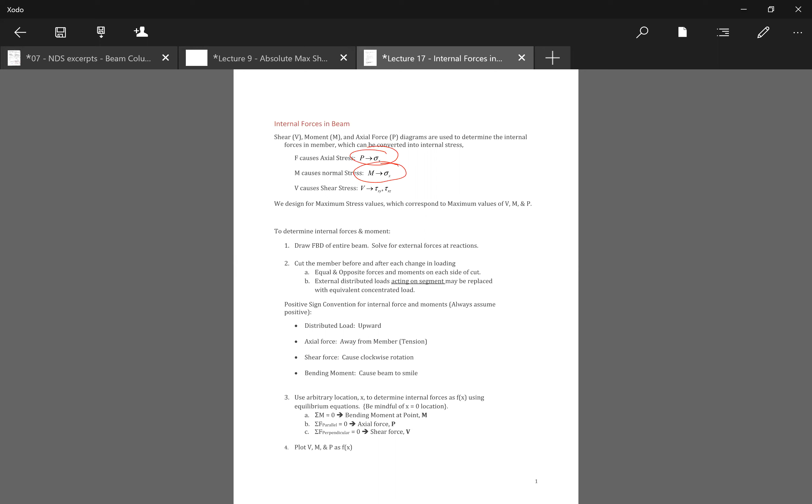Now that shear force will cause shear stress. I haven't shown you yet that relationship between the two, but after we get through moment, we'll go to shear in beams, and you'll see there's an equation that relates the shear force to the distribution of shear stress, in two directions, because anytime we have a shear stress component, say tau xy, we must also have a tau yx. Depending on how you load this beam, you could also have an xz, so we could have our xy or xz depending on the direction of the forces being applied.

So we're designing our beams for these maximum values of V, M, and P, where P is the axial force. In order to determine them, you draw a free body diagram. You have your beam, you take a section cut, and then you draw the free body diagram for that section cut. The whole beam together helps you get your reactions if it's determinate, but then once you have your reactions, you can take a section cut.

So you have, say, your beam with some loading, and you can get these reactions. Once you have those, you can take a section cut. You have this loading, and now you know there's got to be some other kind of internal force—that would be your shear force. And conceivably, you could have a P or an M, depending on how this is loaded.

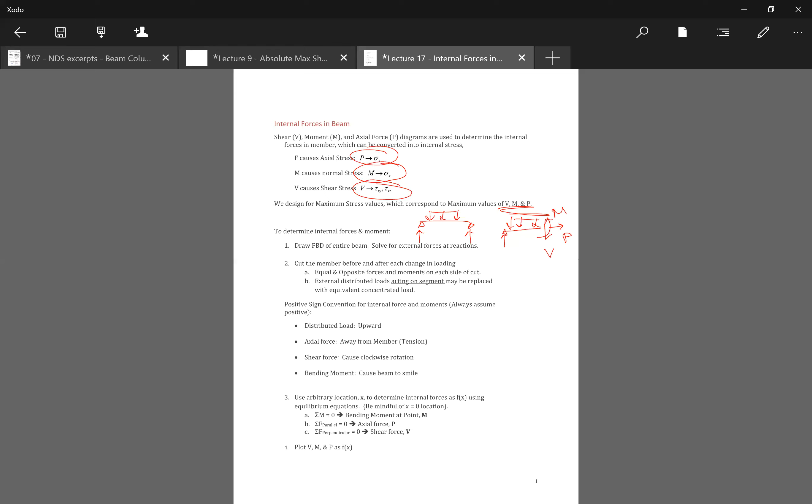When you take a section cut, for example, if you cut it apart like so, you're always going to have equal and opposite—I should draw those the other way—equal and opposite stresses, or forces, on each side. So if you have shear going in one direction on the left side of the cut, it's going to be going in the other direction on the right side. Same thing with moments and axial loads.

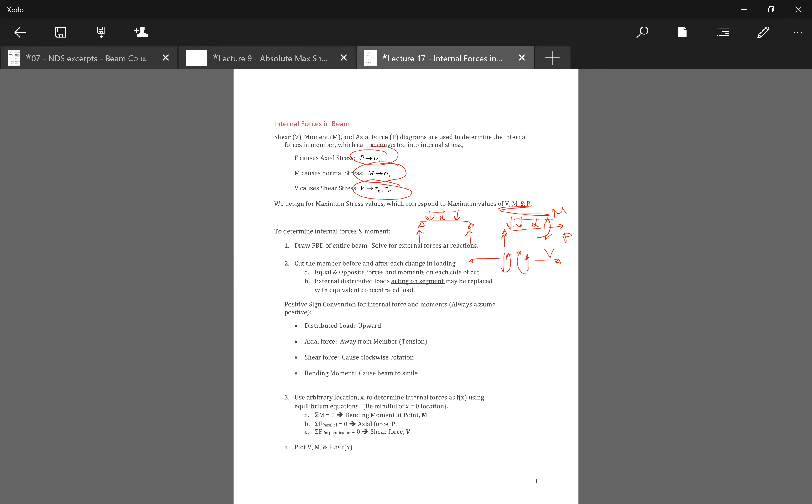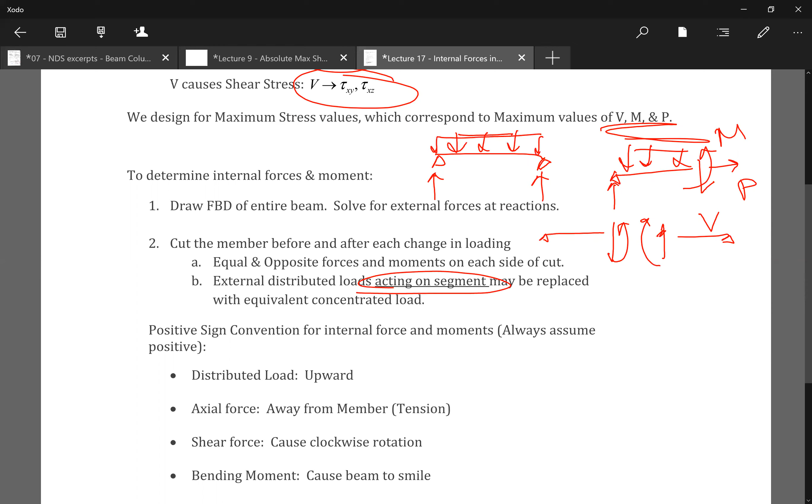This next point is extremely important. It may seem obvious, but it's a very common mistake: if you have distributed loads, you can replace them with a concentrated load, but only the amount of that load that's acting on the segment that you've cut. For example, if we have this distributed load all the way across the beam, that can be replaced.

That can be replaced with a resultant like this if you're doing equilibrium of the whole thing. But if you are doing equilibrium of, say, half of that member, you have your distributed load.

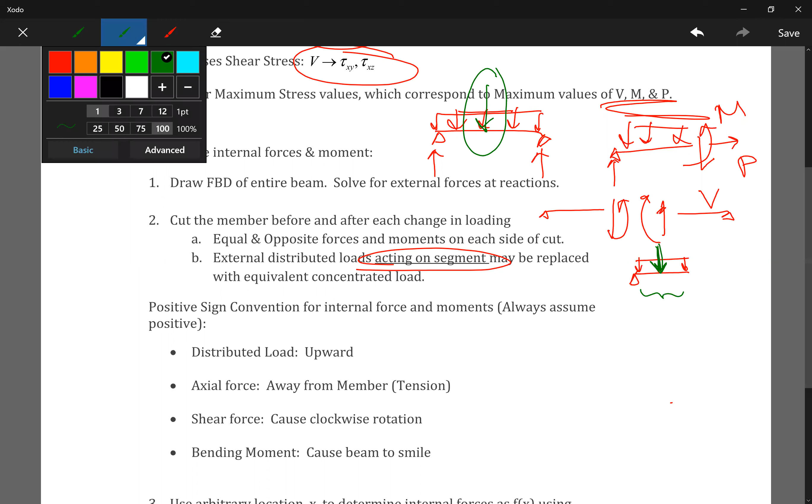Now when you replace that with an equivalent force, it has to only be the force that's equivalent to the load on this segment, and you place it at the centroid of that load. If you were to take this load here, let's make that a different color. If we were to take the whole load and turn it into a resultant at the center, and say this cut is at the center, you would have it placed there. As you can see, that green and that blue arrow are going to give you two different answers, especially in terms of your moment.

So it's extremely important that you only replace the portion that represents the segment that still exists after you draw the cut. Because even the worst case would be if you took this cut slightly to the left of that middle, you wouldn't have a force acting on it at all if you had done it improperly and represented it as the resultant of the whole force.

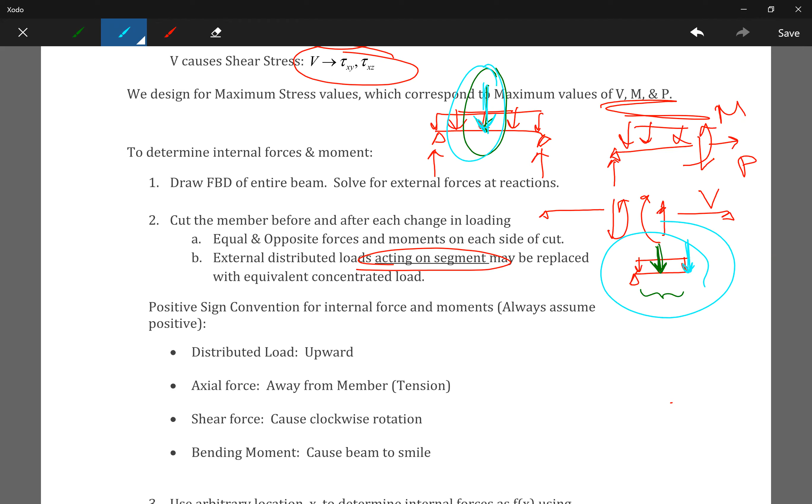Sign convention is really important. If you have a sign convention that differs from what I'm about to show you and it works for you, that's fine. But this is what this textbook uses, and so that's what I'm going to use.

So for our distributed loads, if this is our beam, positive distributed load is upward. And for tension, this one I don't think I've ever seen different—it's always outward. The distributed load I've seen done the other way. In fact, I like to do it the other way, but this is the way the textbook does it: up, tension is out.

Shear force is clockwise rotation. So if you have a cut and you're looking at the right-hand side of a cut, if your arrow is to the right of the member, it should be pointed downward. If it's to the left of the member, it should be pointed upward. That would give you clockwise rotation.

And my favorite: positive bending moment always makes the beam smile.

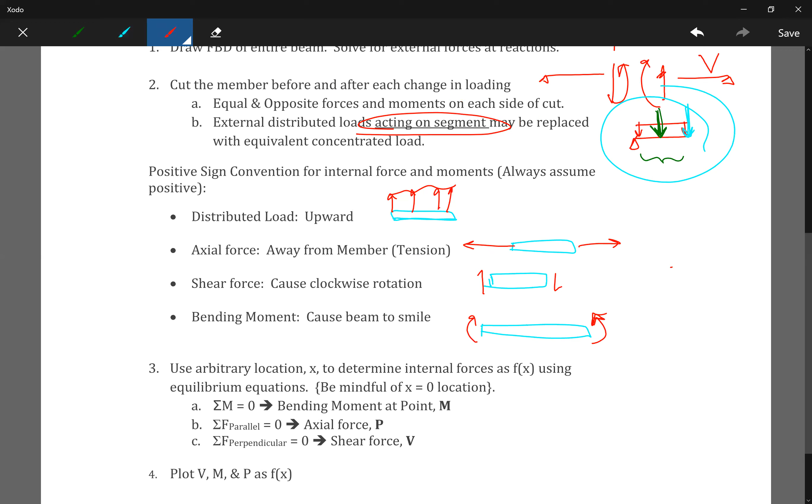So one way to get the values we're interested in is to use an arbitrary x location to determine our internal force. What I mean is, if I have a beam that looks like this, I would break this up into two regions: the first region and then the second region. Starting here, I would have x going from 0 to whatever this L1 is.

And then it's your choice. You can either have x go all the way to the end, or you could restart x again here and get your equations accordingly. You just have to be careful, because when you're getting equations for shear and for moment, how you define x will change your equations. The end result is going to be the same, but...

For whatever reason, let's say our shear diagram was going to look like this. If you define x as starting at that point, this is going to be a linear equation of the form mx—you have a slope and then an x value. Whereas if you were defining x as being continuous from the left-hand support all the way across, now you need to track that all the way back to where it would intersect x equals 0. So now this equation is going to be mx plus b, and you need to figure out what that b would be at this initial x equals 0 location.

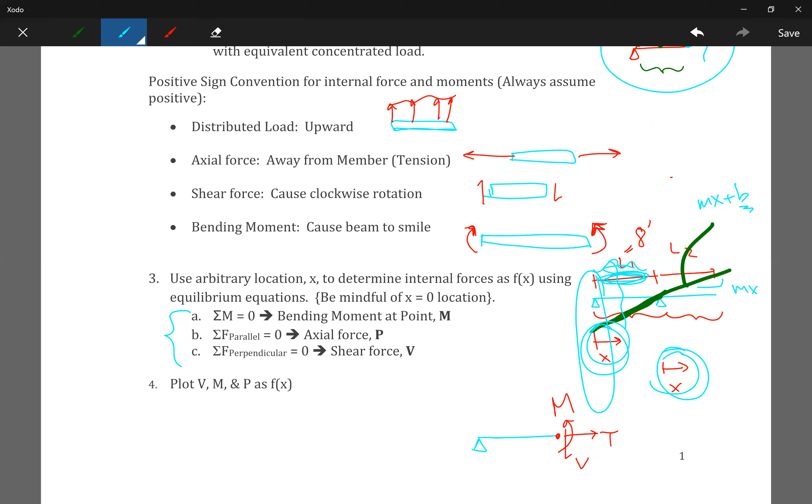Okay. So that's one way to solve for your internal forces. That's kind of a formulaic method that doesn't require a lot of intuition, but has defined mathematical procedures.

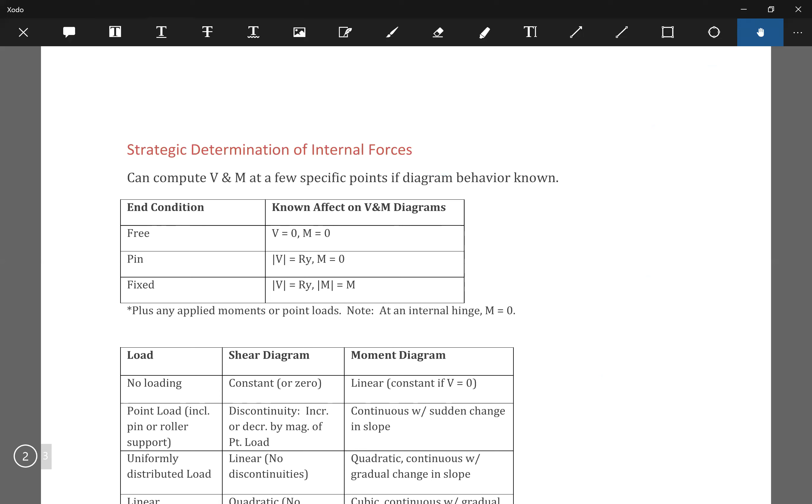My preferred method, because it's faster, is more of an intuitive method, where you strategically determine certain values at certain locations, things you know to be true. For example, certain supports have zero moment or have a known value of shear. So I like to identify those points and then use what I know about the relationship between my load and my shear and moment to visually draw what it would look like, and then I can calculate the numbers using some basic geometry, basically. Cool. So the things that I know.

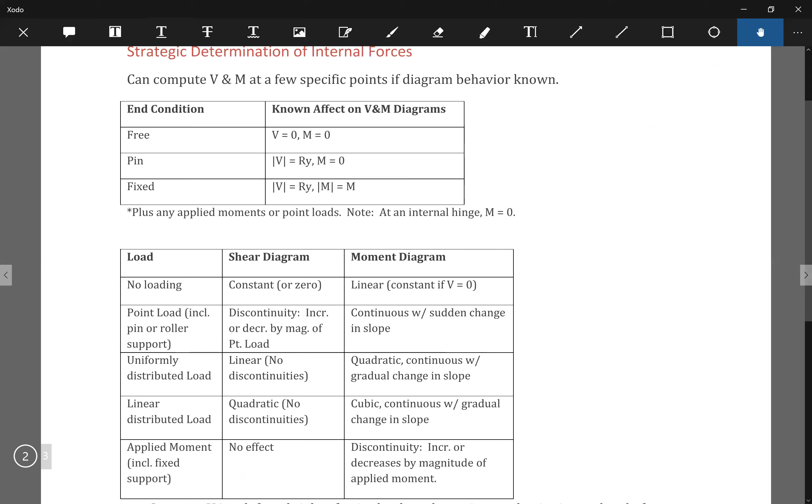When I have a free support, so say I have a cantilever out here on this end, I have zero shear and I have zero moment. So whatever my diagram looks like, I know it has to end at zero for both shear and moment.

When I have a pin, let's say I have something like this, and when I say pin, that includes rollers as well. So when I have a pin or a roller, I know that the shear, you have to be careful with how I say this. On the left-hand side of the diagram, the shear is equal to the reaction. And at any other point, I know that there's a change in the shear that's equal to my reaction. And I know that the moment is zero at that point. So whatever this reaction is here on the left-hand side, I know my shear diagram will start at that value, and then I know it's going to end back at zero. It always ends at zero, unless there's some shear moment at that point. But it always closes.

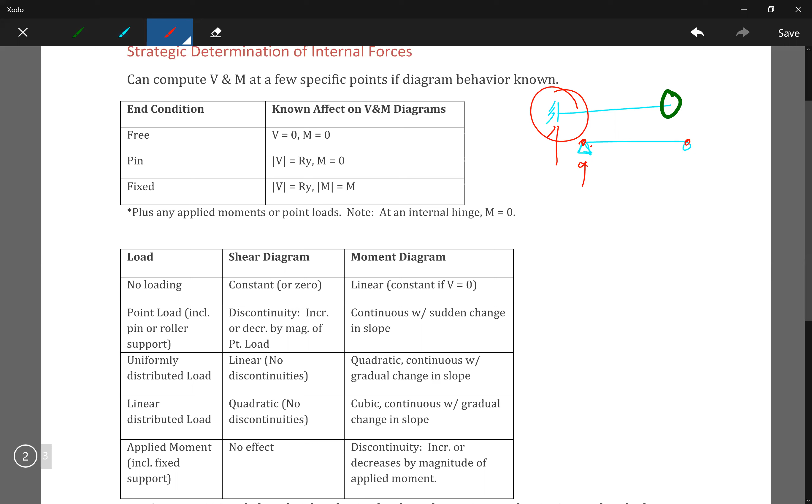And I know that the moment at these two points will also be zero. The reason that you get moment is because you have resistance to bending at that point. But if you're connected to a hinge that can rotate freely, there is no resistance to moment. Therefore, you can't develop moment. If you fix it and you don't let it rotate, now you have a moment present. So at a fixed end, what I know to be true is that if I have some reaction here, assuming it's on the left-hand side, that will be the value of my shear, and that will be the value of my moment, whatever that reaction is. You do have to be a little bit careful with the sign. Sometimes you can get turned around with the sign, but there are tricks for that as well.

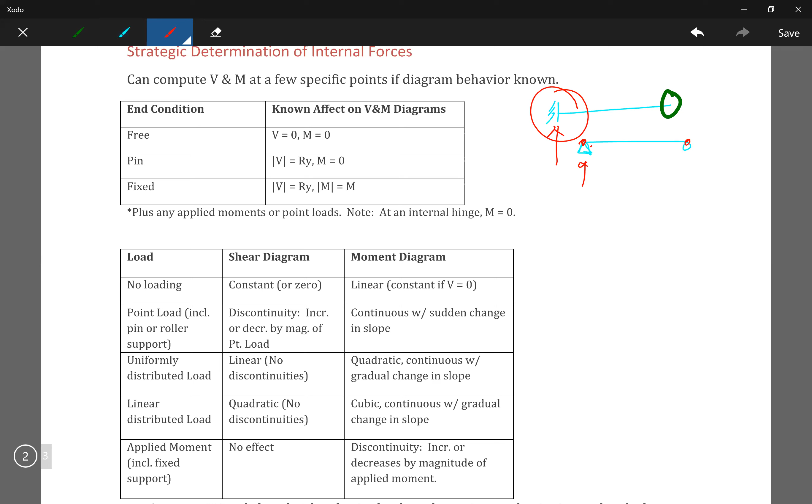All right, so then we look at our loading. If I have a region of no loading, I know that my shear diagram is constant. So if I have, say, just a point load here in the middle, to the left and to the right of that point load is what I call no loading. So the shear diagram for that should be constant. What do you know about the shear at this left-hand support? It's equal to the reaction, which happens to be half of that load. Then I move to the right and I say, okay, now I have no loading. That means there's no change. I have a constant value of shear.

So that's step number one. Step number two is point loads. Anytime I have a point load, my shear moves in the direction of that point load. So this point load is pointed down, my shear goes down by that same magnitude. And then what happens when I continue to the right? Continues constant. And then at the end, I have a reaction going up and it closes my diagram. Always has to close. So I can just look at this and I intuitively know what shape it has to take. I didn't have to do any algebraic formulas. And then if I want to know this magnitude here, I need to solve for the reaction. And there we go.

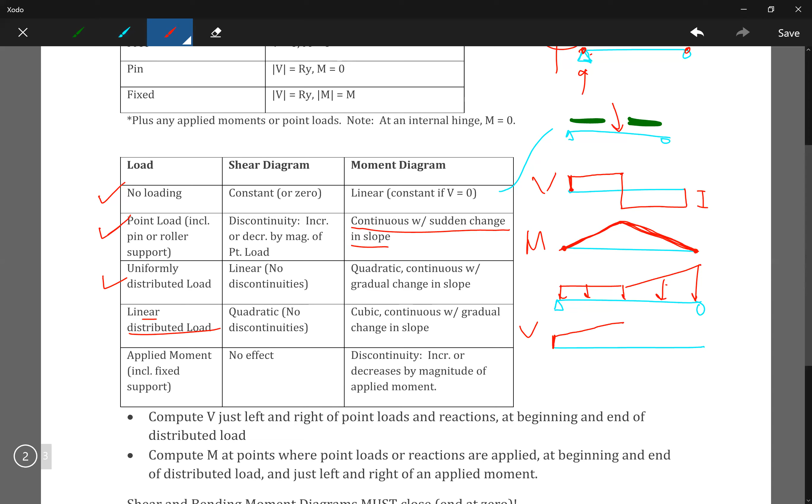We know we're going to start with some reaction for our shear. And then we're going to have, if we have a uniform distributed load, you will always have a linear shear diagram. So this is going to go up. And if you have a linear distributed load, which is this right here, so it's increasing magnitude, it is going to be quadratic. So the scale that I've chosen is going to make that intersect with the other diagram, but let's see if we can.

So it's going to go like that. Oh, I don't know what I'm doing. Don't do that. That was linear. Quadratic. No, I'm going the wrong direction. Should be going down.

Right, they need to go the same direction as the loading. So if I have distributed loading going downward, this linear slope needs to be going downward. Then this continues downward. That's better. And now my reaction on the other side, which will be larger because more of the load is over on that side, is going to come back up to close it. So I don't have any numbers, but I know the general shape.

So when I have that uniform loading, it's linear with no discontinuities. And when I have the linearly increasing or decreasing distributed load, it's quadratic, but once again with no discontinuities. So at this point right here, it should be continuous. There should be no discontinuities. And in fact, it shouldn't have like a sudden kink in it because these two have the same magnitude at this point. It should just be gradually changing from there.

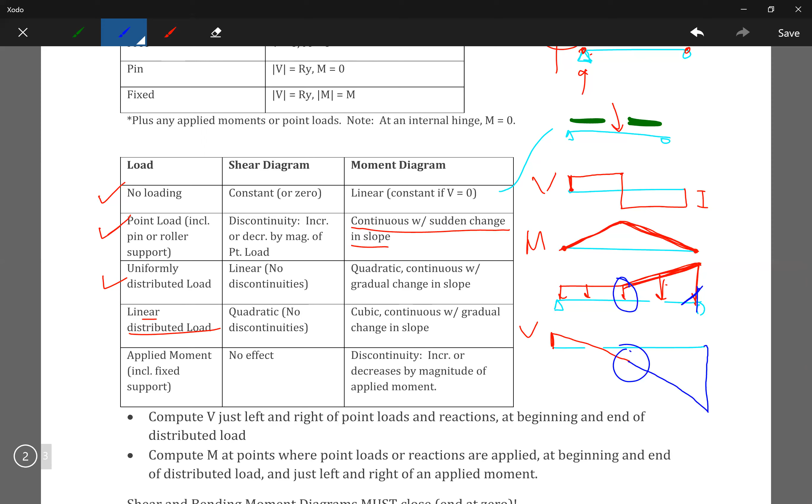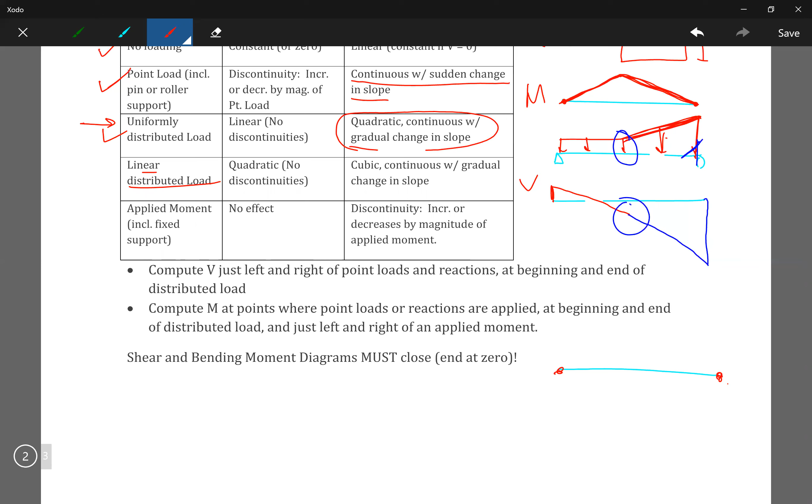Okay, so then for the moment, let's see, moment. Come down here. We know we start and we end at 0. For the uniform distributed load, it's going to be quadratic and continuous with a gradual change in slope. So let's see, we're going to be quadratic. So to answer your question about how to know which direction it goes, let's see, do I have it written here somewhere? I don't guess I wrote it. Okay.

What we're going to talk about in just a second is that the slope of the shear diagram is equal to the distributed load. So this slope here is equal to that magnitude. So if this has a positive magnitude, this should have a positive slope, and vice versa. So similarly, your quadratic equation, if we're integrating this linear portion, your moment's slope should be equal to your shear. So where we have this intersection here, we should have 0 slope. And where we have this positive value of shear, we should have a positive slope.

But the problem is that could go like this, or it could go like that. So the other thing to keep in mind is what I just said, the slope of this diagram is the magnitude of the shear. So yes, we've agreed that it's positive this whole length, but it starts from a relatively big positive number and goes to a relatively small positive number. So that means that your slope should be starting with a relatively big positive number and then approaching 0.

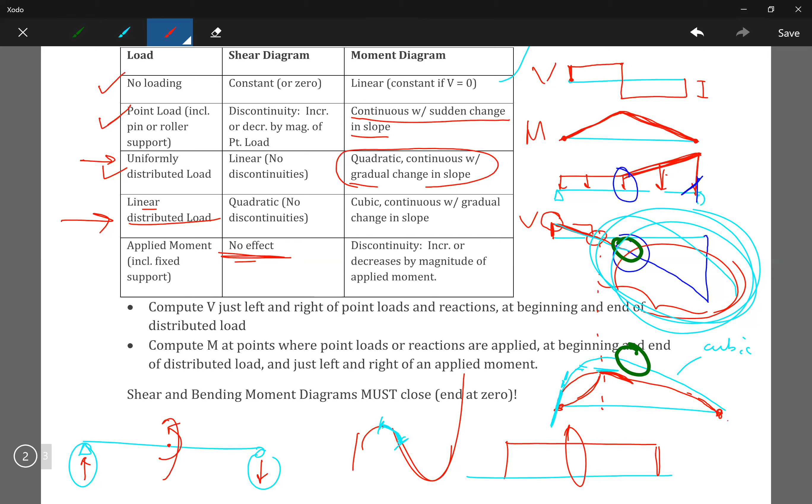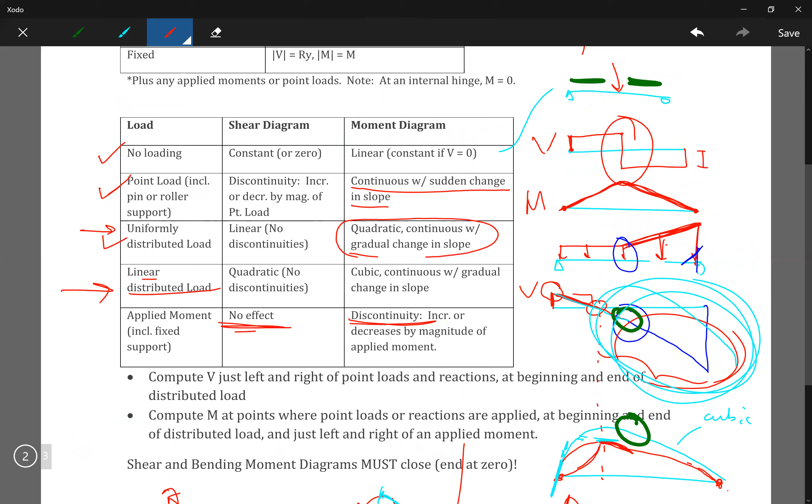But this applied moment in the middle has no effect on that shear diagram - you don't have any change in slope or magnitude at all. Then it does create a discontinuity in your moment diagram. Just like a point load causes a sudden jump in the magnitude of your shear, this causes a sudden jump in the magnitude of your moment. So if you have your diagram like this and you start at 0, you're going to be going up, then you have this sudden jump, and then you're going to go up again. You might ask yourself how do I know whether this is jumping up or jumping down? Well, there are 2 ways. One is when you're integrating the shear, it's positive - this whole thing is positive, so these lines always have to be positive slope. You know you start at 0 and end at 0, so you know those 2 lines have to look like that, and therefore you have to have this go down in order to make it continuous. You always start with the things you know with certainty, and then you fill the rest in.

But there's another way to figure it out. I always think about what that moment would be doing to the portion of the beam that is to the right of the moment. Because here's the problem - if you look at the left-hand side, you might think this looks like a happy beam, right? This looks like a positive moment. But don't be deceived - you always look to the right of what the moment is doing. So you keep this moment rotating another 180 degrees, right? The same moment is actually making the right-hand side very sad. So as you're moving from the left to the right, it's making the beam sad. Therefore, it's going down. That's what happens in my head when I do moment diagrams.

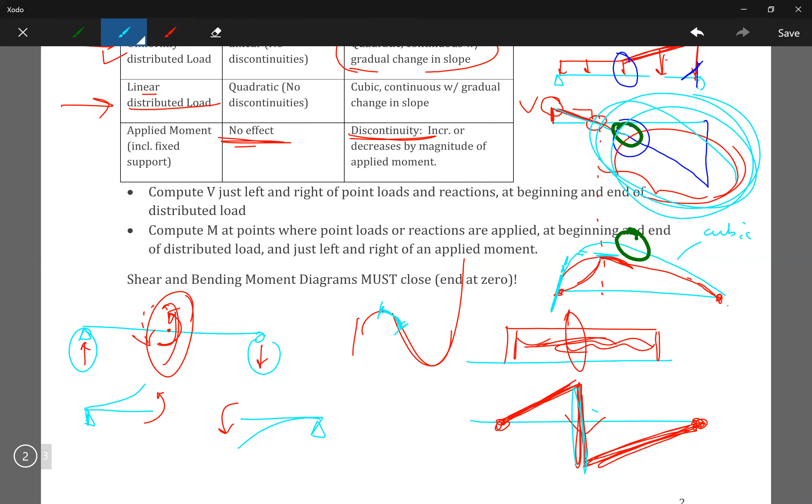Compute shear just to the left or right - so anytime you have a point load, a reaction, or a concentrated moment, you can compute the values just to the left or right of that to get the value of these diagrams. You can probably get the shape in a minute, then spend the rest of your time taking those little cuts to figure out the corresponding important values. So just to the left and right of point loads or reactions, or at the beginning and end of a distributed load, compute the moment at points where point loads or reactions are applied. It must always close - it must always end back at 0, start at 0, end at 0.

Okay, one last page. So we have these relationships between the distributed load, and we've already kind of alluded to them in order to finish talking about that table. But it's the idea that if we have a small segment of a beam and it's being acted on by some positive distributed load, W, acting over delta X.

Let's draw our shear as being positive. So that's the shear at X, and this is going to be shear plus delta shear. So there's a slight change in the shear from the left to the right-hand side of this segment, and so the right-hand side becomes V plus delta V. If we do equilibrium, sum of the forces in the y direction, we get this equation, where we have positive V on the left-hand side, negative V plus delta V on the right-hand side, and then positive W multiplied by delta X in the middle.

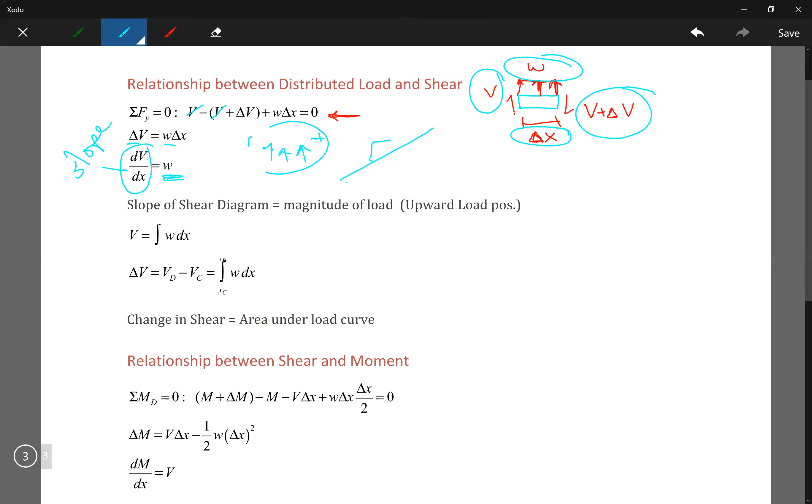You can integrate it. So we can go back to where we have dx on the other side. We can say that dv equals w dx, and then we can integrate both sides to get that the shear is the integral of that w. So if the loading is some function, you could integrate it to get the function of your shear.

Important point is when you do this integral, what you're really doing is you're integrating between two points, so you're actually getting the change in shear. It's okay to write it like this if you're getting an equation, if you have an equation of your shear and you're integrating that equation, but just always keep in mind there's some starting value, some constant that needs to be added to it, right?

So if I integrate... I don't want to integrate... if I integrate 5, God, what am I thinking. It's embarrassing. But you get a constant. So if you integrate 5, it's 5x plus c, right?

Okay, good. You often leave that c off, you often don't care about it. But if you're going to be exactly plotting these equations, you're going to need to know what that c is.

Oftentimes, you already know that you're starting at a value of 0, or if you're going across this diagram, say you have a line here, and then you're going to have another line here with a different slope, you already maybe figured out the starting point, so you're not so concerned about what that constant is.

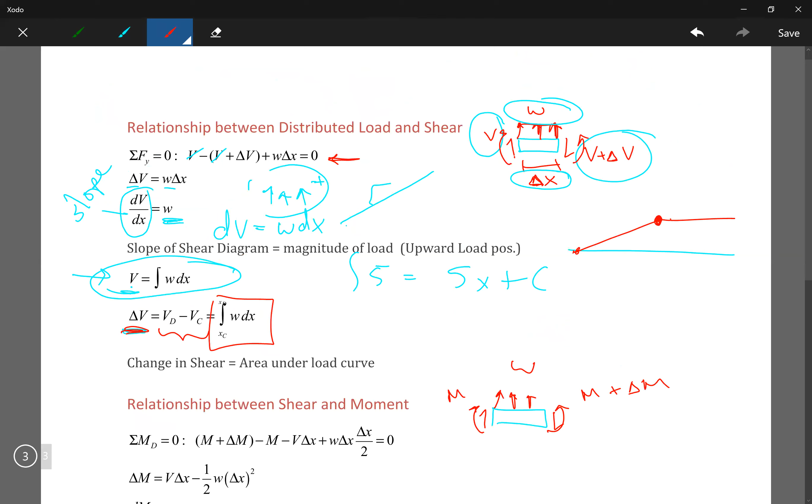So you can imagine that there were moments on this first diagram, but they didn't matter because I took the sum of the forces. Moments don't enter into that equation. But now I want to take the sum of the moments.

So I have a positive moment coming from this m plus delta m. I have a negative moment coming from the m on the left. And let's see, we have our shear and our shear plus delta shear. So I have...

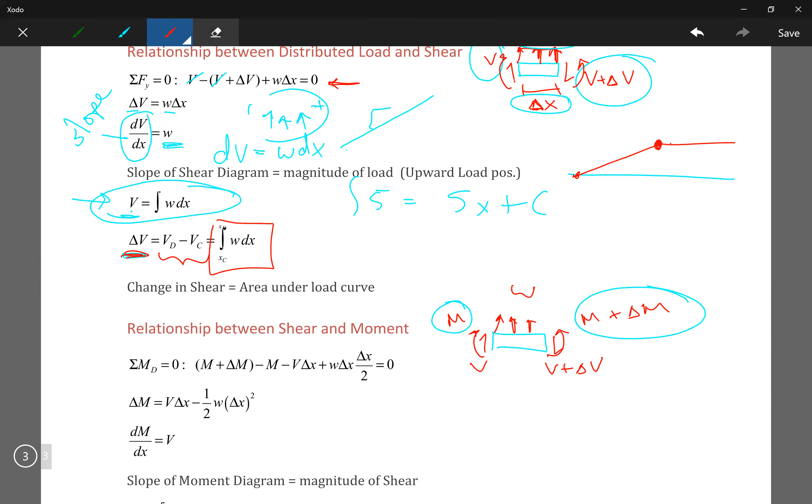Where did I label point D? We have to pick, for the moments, it doesn't matter what point we're taking the moment about. They're always the same in every equation. But if I want to start getting moments of these forces, I need to pick a point to take the moment about. So I'm just going to pick this point here.

I want to put that in blue. So I'm going to call that D and take the moment about that point, which means that this force doesn't apply. But I do have, if this is delta X, a negative moment caused by the shear force on the left. And then I have...

Should also be negative, shouldn't it? The moment caused by the distributed load. So this should probably be a negative sign.

Okay. All right, so these two cancel out, this moment and that moment.

We're pretty confident that this should be negative, yeah? Okay, that means it should be positive here, because I'm moving that to the other side of the equation. Okay, good. Okay, eventually this has to get out of my problem because I know my end result's fine.

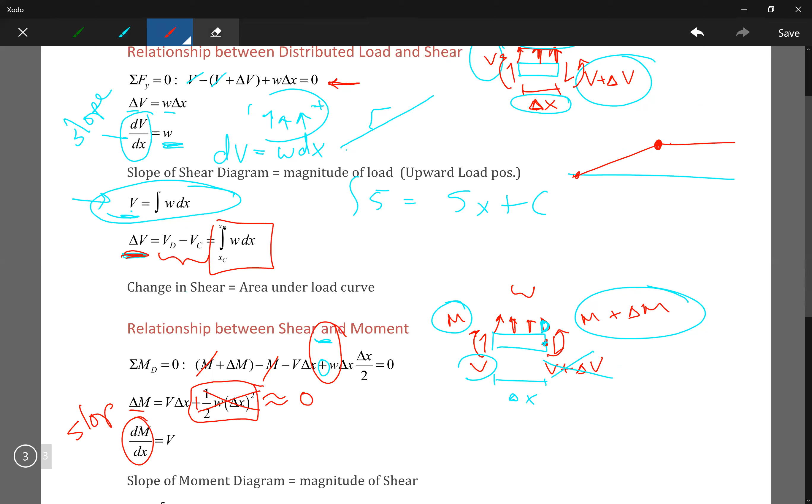But I'm left with delta m, or dm, equals v dx. So I can divide by dx once again, and I get that the slope of the moment, or the rate of change of the moment, is equal to the shear.

And same thing, instead we could integrate the shear with respect to x to get our moment. So that's why when you go from your shear diagram to your moment diagram, to get the magnitudes of the moment, you can just calculate the areas under the shear diagram, because those areas are equal to the integral. And so what you're getting when you take those areas is the change.

When you leave off that constant and you just say, if you have a shear diagram that goes like this, the area under here, if this is A and this is B, that's the change in the moment from A to B. So that's how much you increase. And then down here would be how much you decrease, because that's a negative value.

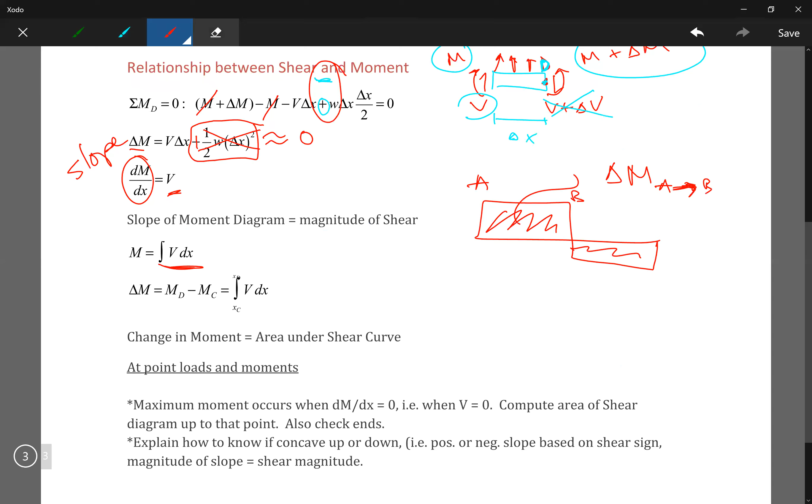So maximum moment occurs when the slope is equal to 0, right? If you have a moment diagram that goes like this, when the slope is equal to 0, that's your maximum. So when the slope is equal to 0, that means your magnitude of your shear equals 0.

Compute the area of the shear diagram up to that point, and then that will give you your value of that maximum moment.

Okay, so we talked about, do you want me to go over concavity again? One more time, and then we'll move on to March Madness. Oh my God, I can't wait. Okay, so what time is it? Okay, it's gonna be mad because we only have like 20 minutes for it. Okay.

So once again, if we have, say, a distributed load, the shear diagram is going to go like that. So the question is, how do you know whether something—I think by intuition or repetition you know that this is the moment diagram—but how do you really know that? And how do you know that in another situation where it's not so apparent? So if you have...

A positive or a negative slope, that indicates whether you're concave down or concave up. So this slope here is negative slope, which means I get a negative parabola, or concave down parabola. And then the magnitude of that parabola—the slope of that parabola—is always the magnitude of my shear diagram.